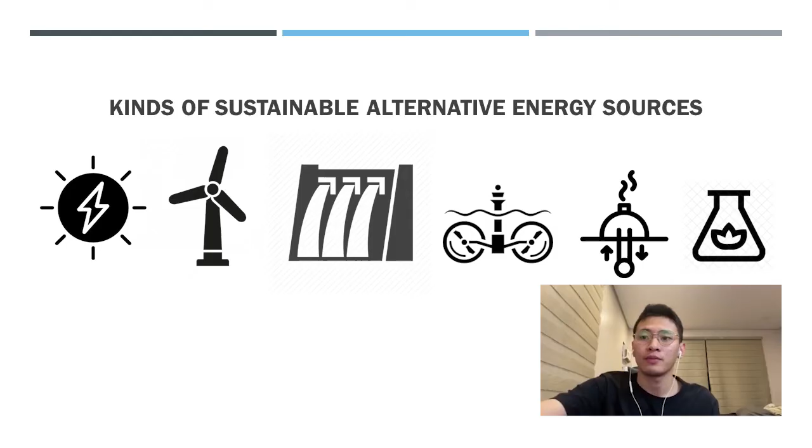First, solar energy. It is a renewable energy that is gathered using solar panels. Sunlight is one of our planet's most abundant and freely available energy resources. The amount of solar energy that reaches the Earth's surface in 1 hour is more than the planet's requirement for a whole year. Although it sounds like a perfect renewable energy source, the amount of solar energy we can use varies according to the time of day, the season of the year, and the geographical location.

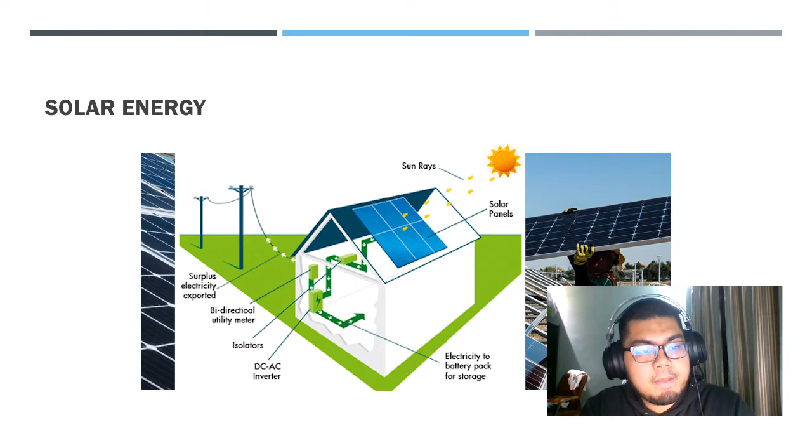Solar energy is also a popular supplement for energy. The advantages of solar energy are it lowers your electricity bill, improves the value of your home, reduces carbon footprint, and combats rising electricity costs.

The disadvantages of it are it doesn't work for every roof type, not ideal if you're about to move, buying solar panels can be expensive, it uses a lot of space, and the efficiency of solar energy depends on the weather.

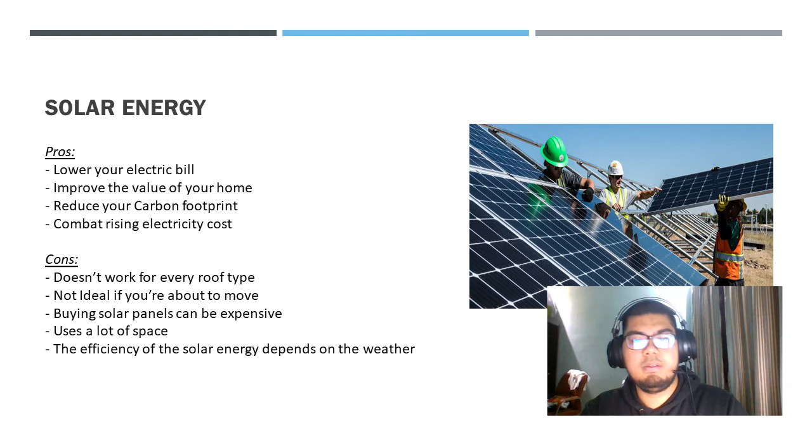Next is wind energy. Wind energy is a renewable energy that is gathered using wind farms. Wind is a plentiful source of clean energy. Wind power can make an ever-increasing contribution to the national grid. To harness electricity from wind energy, turbines are used to drive generators which then feed electricity to the power sources, or national grids.

Although domestic or off-grid generation systems are available, not every property is suitable for a domestic wind turbine.

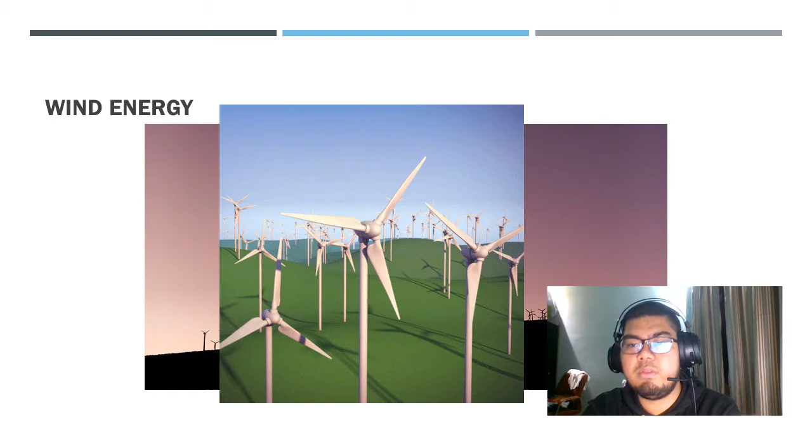The advantages of wind turbines or wind energy are that wind power is cost effective, it is a clean fuel source, wind is a domestic source of energy, it's sustainable, and wind turbines can be built on existing farms or ranches.

The disadvantages of it: wind energy is intermittent, wind energy can cause noise and visual pollution, and wind turbines have some negative impacts on their surrounding environment.

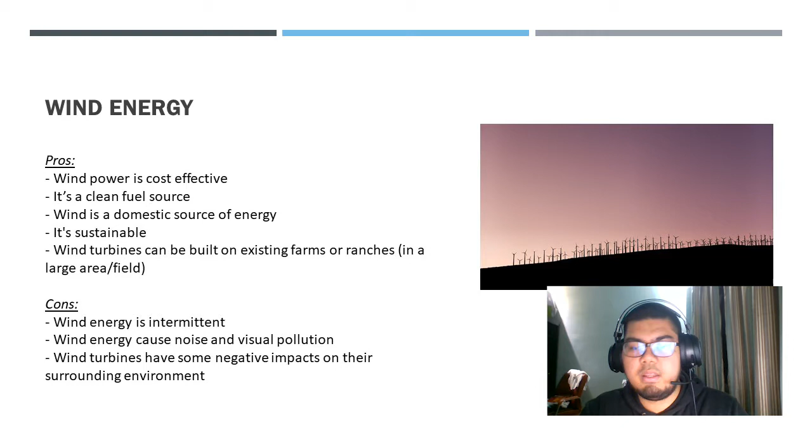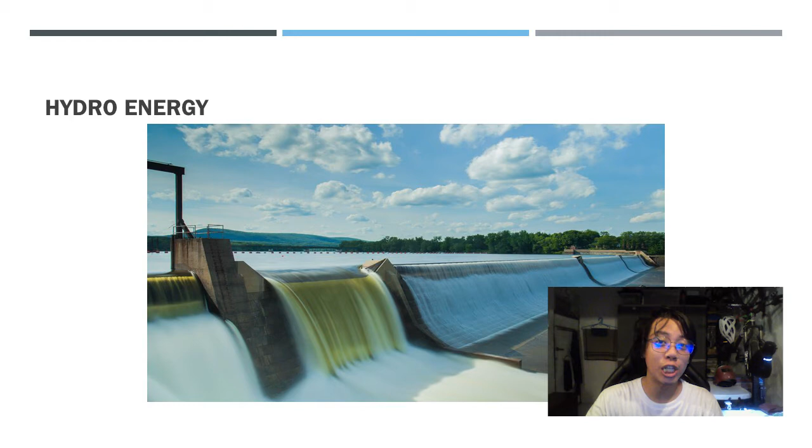Hydro energy. As a renewable energy resource, hydropower is one of the most commercially developed, built by a dam or a barrier. A large reservoir can be used to create a controlled flow of water that will drive the turbine and generate electricity. This energy source can often be more reliable than solar or wind power, and also allows electricity to be stored for use when demand reaches a peak.

Like wind energy, in certain situations, hydro can be more valuable as a commercial energy source, but depending much on the type of property, it can be used for domestic and off-grid generation.

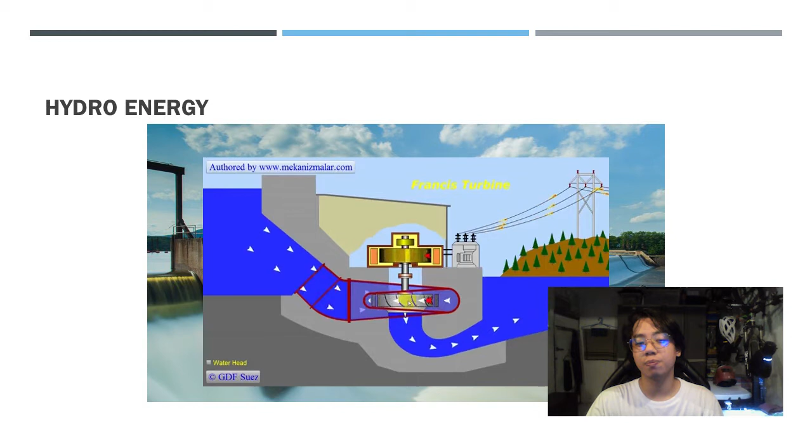The advantages of using this kind of energy source: it is good for the environment, it is a renewable resource, reliable and highly efficient, flexible and safe, and economical. The disadvantages of using this kind of energy resource: it has environmental impact, displaces people, and it is expensive, with a limited source of reservoir and droughts.

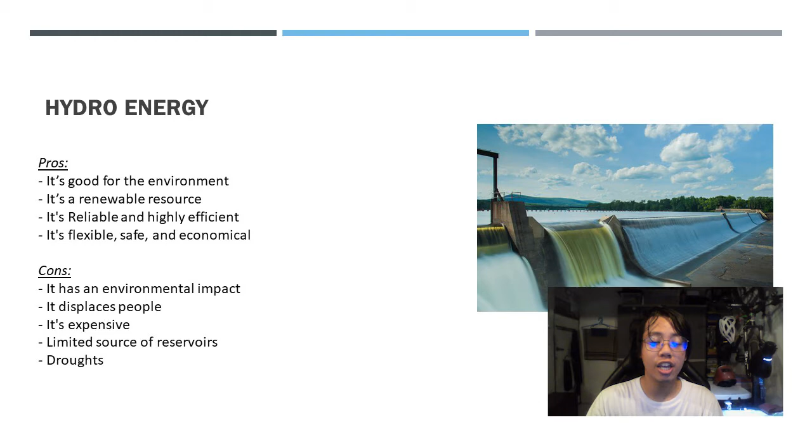Next is tidal energy. Tidal energy is another form of hydro energy that uses twice daily tidal currents to drive the turbine generator. Although, unlike some other hydro energy sources, tidal flow isn't constant, it is highly predictable and can therefore compensate for the period when the tide current is low.

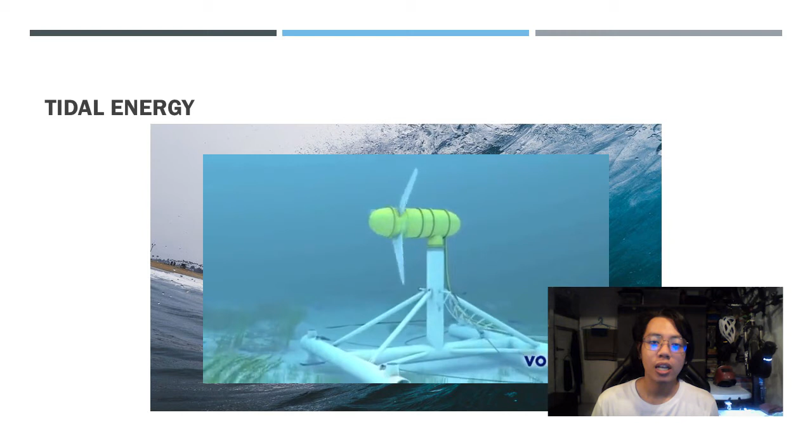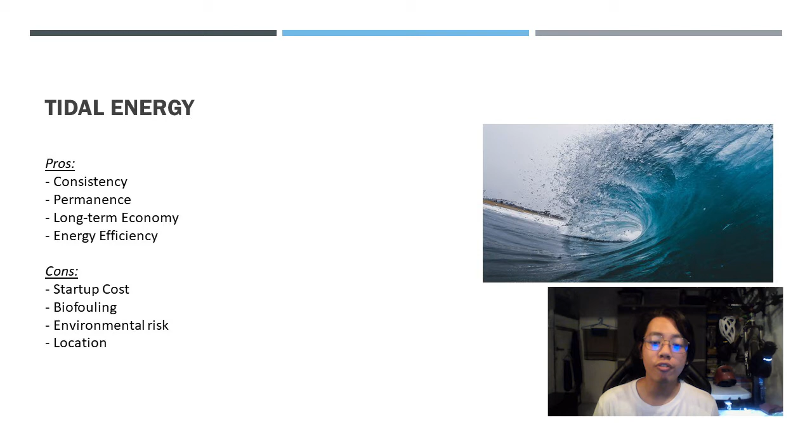The advantages of using this kind of energy source are consistency, permanence, long-term economy, and energy efficiency. The disadvantages of using this energy source are startup costs, biofouling, environmental risk, and location.

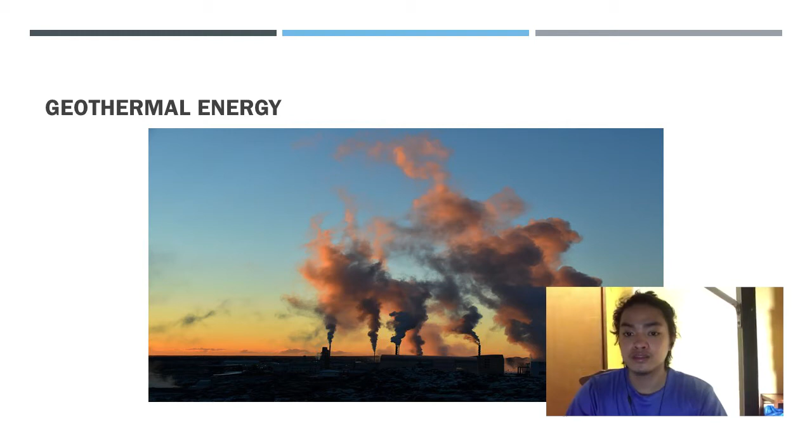Geothermal energy works by harnessing the natural heat below the Earth's surface. It can be used to heat homes directly or to generate electricity. Geothermal energy is generally considered environmentally friendly and does not cause significant pollution.

It is great for heating and cooling, and even small households can benefit. Harnessing geothermal energy does not involve any fuel, meaning less fluctuation and more stable electricity prices. Geothermal energy is also found everywhere.

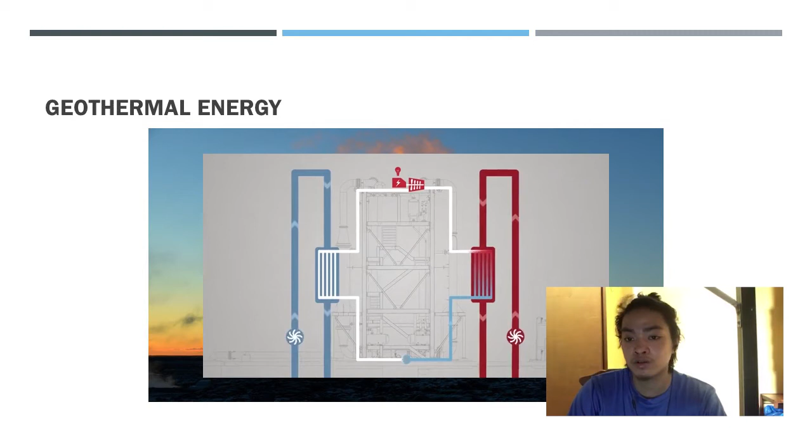But there are some minor environmental issues associated with geothermal energy. There is an abundance of greenhouse gases below the Earth's surface, some of which migrate toward the surface and into the atmosphere. These emissions tend to be higher near geothermal power plants.

Next is the stability of the surface during the construction of geothermal power plants. This construction can affect the stability of the land. In fact, geothermal power plants have led to subsidence, or the motion of the Earth's surface.

Most geothermal resources cannot be utilized in a cost-effective manner, at least not with our current technology, level of subsidies, and energy prices.

Geothermal power projects are expensive. The exploration and drilling of a new reservoir come with a steep price tag, estimated around $2 million to $7 million.

A good geothermal reservoir is hard to come by. Some countries have been blessed with great resources, like Iceland and the Philippines, which meet nearly one-third of their electricity demand with geothermal energy. To be more specific, geothermal energy is generally regarded as environmentally friendly, sustainable, and reliable. This makes it a no-brainer in some places, but heavy upfront costs stop us from realizing its full potential.

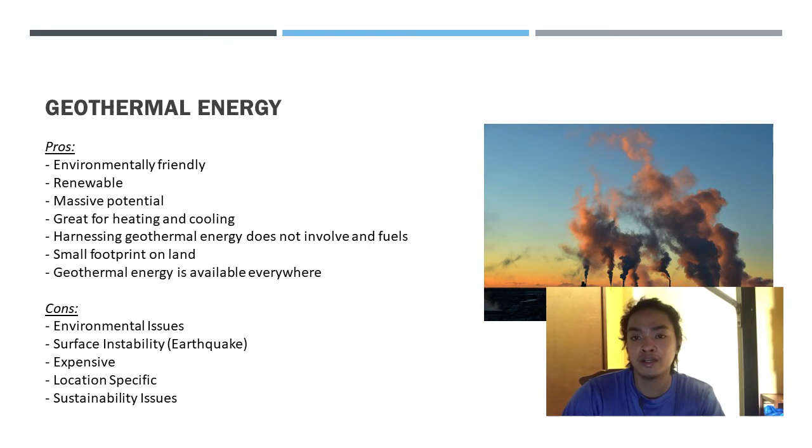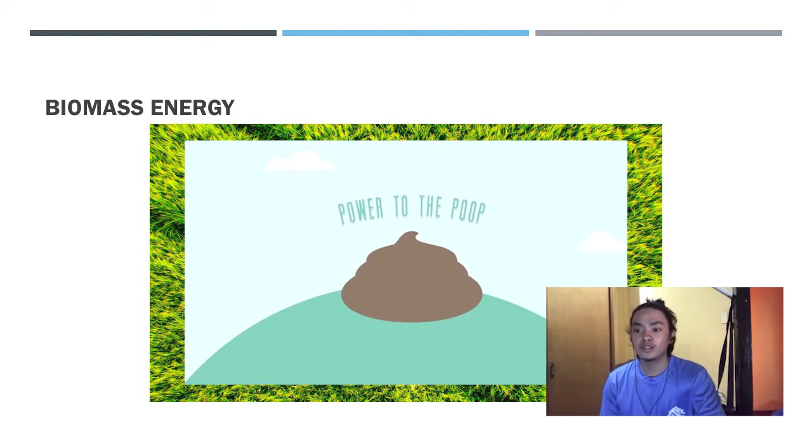Biomass energy is the conversion of solid fuel made from plant materials into electricity. Although fundamentally biomass involves burning organic materials to produce electricity, this is not like the burning of wood. Nowadays it is a much cleaner, more energy-efficient process, converting agricultural, industrial, and domestic waste into solid, liquid, and gas fuel. Biomass generates power at much lower economical and environmental costs.

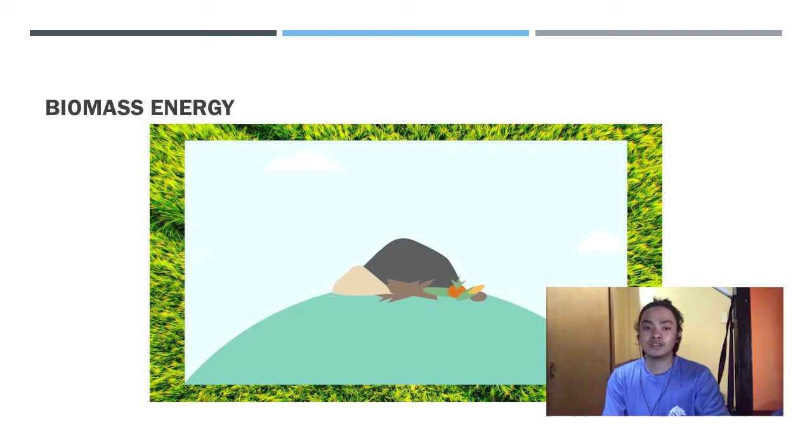Biomass energy is a source of energy considered renewable. As biomass sources can be converted to fuels and electricity, they can help in reducing dependence on fossil fuels. Carbon neutrality is one of the major advantages of biomass energy.

During photosynthesis, plants absorb carbon present in the atmosphere, and it is released back again when they are burned in a biomass energy plant. Generating energy from biomass materials can greatly help in waste management, which has become a major issue in many countries.

But there are some negative effects of biomass energy. Biomass contains carbon and releases carbon dioxide upon combustion, and the time to recapture this carbon may vary depending on the type of biomass. Using fuels produced from biomass also results in the release of various gases, such as carbon monoxide and carbon dioxide.

In some cases, these fuels are found to release higher particulates and pollutants into the atmosphere compared with those produced by traditional fuel sources.

The construction and operating cost of a biomass energy plant can be expensive in relation to traditional forms of power generation. Storage facilities also require huge space, as harnessing energy from biomass involves a selection of different processes.

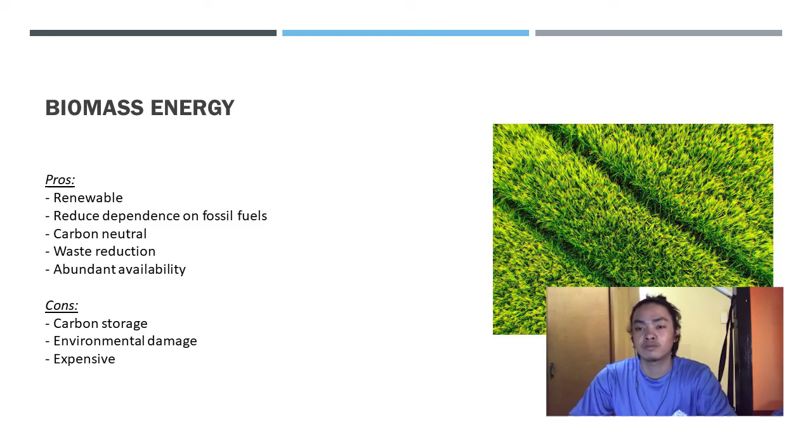In short, these alternate energy resources are cleaner and cheaper since the energy is gathered directly from the source.